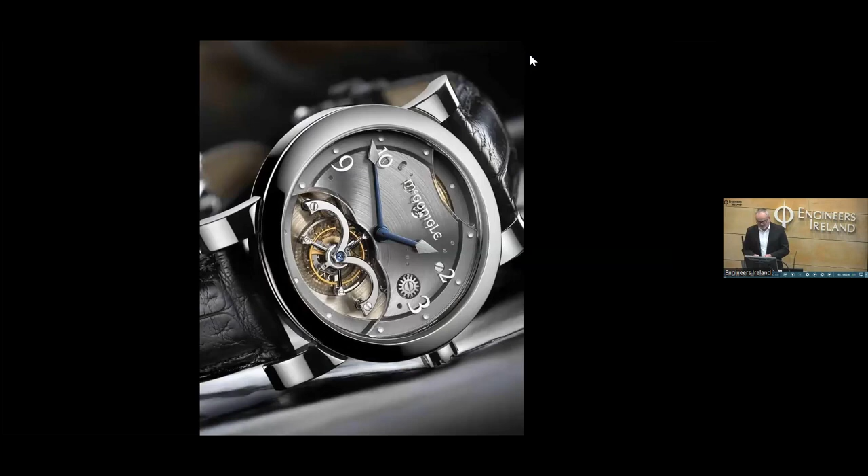Two of my brothers, Stephen and Anthony, are also watchmakers. They also attended the Irish Swiss Institute of Horology. Myself and Stephen developed our own brand, McGonigle Watches — this was made at the Christophe Claret company in Le Locle, and this is our first model. I've since left McGonigle Watches, and it's now run by Stephen, who is making some extraordinary watches.

He currently makes a minute repeater that is absolutely wonderful — one of the finest, I think, on the market. He has another brand as well, McGon Watches, at a more accessible price point, but it's another wonderful brand he has developed.

I developed my own brand, Ilon Watches, and this is the model I currently make, the HB1. I'll talk about it later on, towards the end, after I show some of the techniques I use to make the watch.

With this talk, I wanted to cover how watches were originally developed and some of the techniques used to make them, how they transformed into precision instruments, how eventually they were industrialized, and how modern techniques, technology, and materials have since been applied to how they're made currently. The first watches appeared in the 16th century.

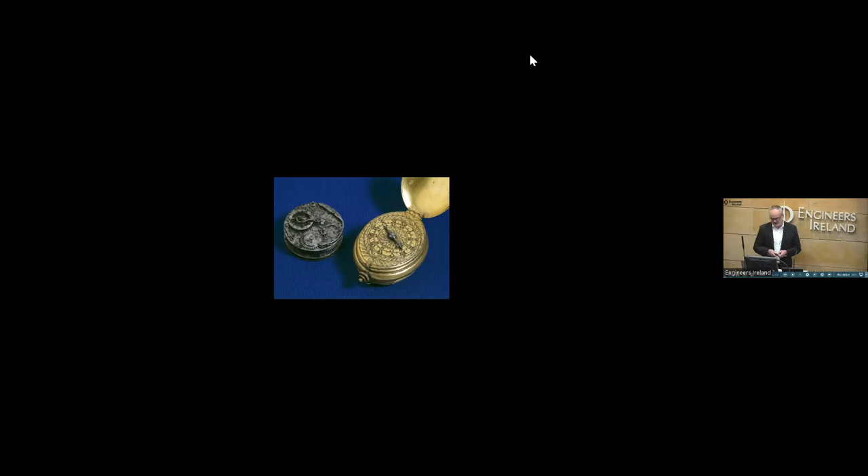But they were sought after by wealthy people, as symbols of prestige, and they advanced in the 17th century to more ornate watches. You can see the introduction of brass over iron — they began to understand you'd have much greater wear qualities with gears made of brass meshing with pinions made of steel.

They also started to develop more sophisticated equipment to make the watches, using more indexing tools to get more even cuts on the wheels. They would use jigs, so with a jig you're holding a very small component and using a large tool to work on it. The jig guides the tool, giving a more precise and better finish, all of which contributes to lower friction. The result is better power transmission, better timekeeping, longer running.

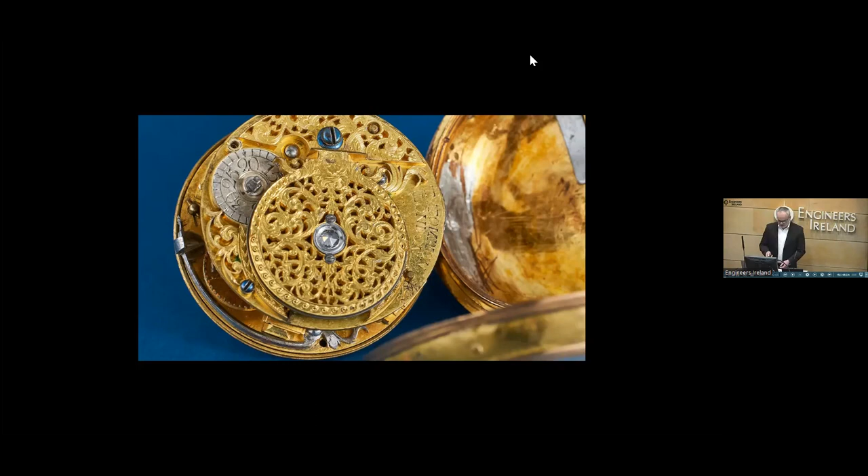Then in the 18th century, watches became more precision instruments. Obviously you still had watches that were ornate and made for very wealthy people. But there was a great need to solve what was probably the technical challenge of the day: the calculation of longitude in navigation.

Latitude in navigation is relatively easy to calculate. You measure the height of the sun at midday and relate it to a set of tables for the time of year, and you can tell what latitude you're on. But longitude is a lot more complicated, because the sun, which is the basis by which you measure your position, is traveling across the sky. It was a puzzler. The only way they could determine their position was through dead reckoning, and that was always very approximate—your calculations could be thrown out very easily, and once they were, you could not reestablish your position.

So the solution was thought to have been worked out by astronomers, that they would find some way of relating celestial observations to where you were and calculating your position. Incredibly complicated solutions were devised. Some of them worked, but they weren't really applicable from standing on the deck of a moving ship.

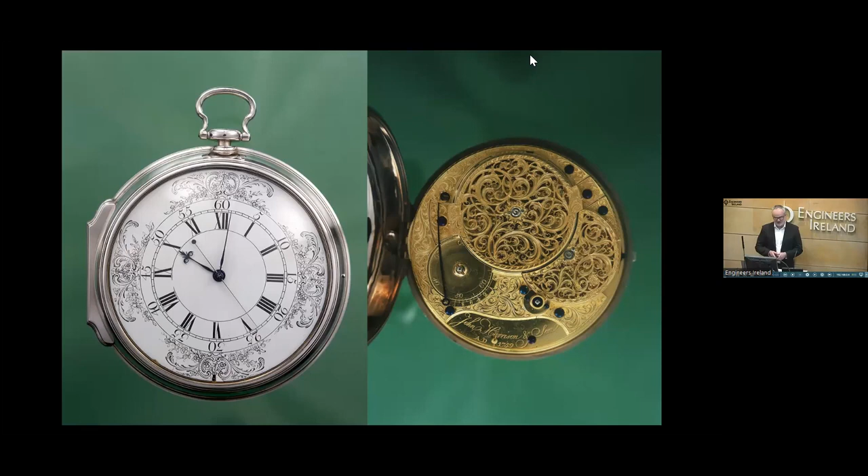They were technical marvels. The first clock he made, unsurprisingly for a carpenter, was made out of wood—even the gears were made out of wood. But he displayed a great understanding of materials, using lignum vitae, a wood that produces a natural oil, for bearings, to avoid the necessity of using a lubricant.

He used diamond for the impulse surfaces, and he also used a system of thermal compensation. Temperature is a problem with timepieces because variations in temperature cause metals to expand and contract, which varies the timekeeping. He used measured lengths of materials with known rates of expansion, paired with other metals with different rates, using them against each other to perfectly balance out the thermal compensation.

It was a kind of groundbreaking moment, because for the first time in history, people were placing their trust in an instrument rather than observations in nature. They were placing their lives and their fortunes in this technology, and it was a groundbreaking moment in human history.

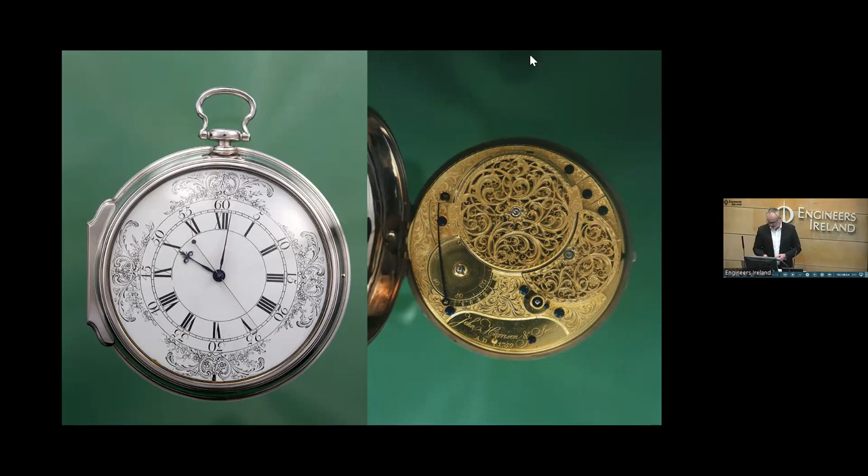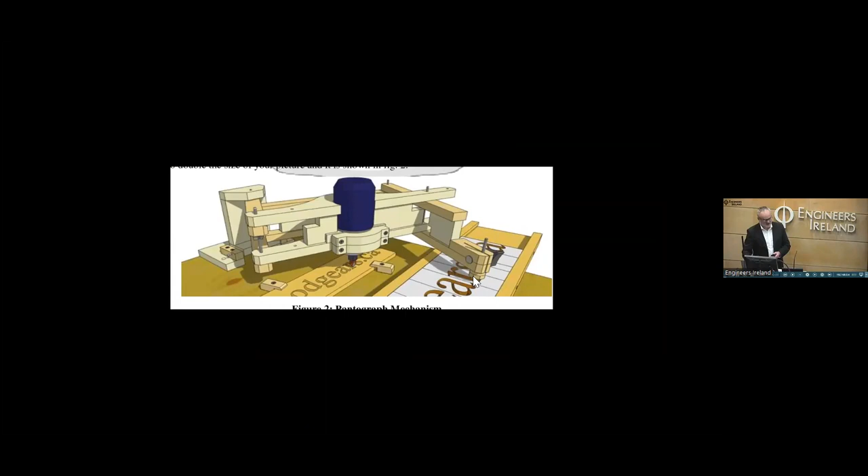One of the first tools to help with this endeavor was the pantograph machine. Engraving machines nowadays use this principle, where you have a template, and following the arrow here, you're using the template to follow a large pattern, and it's engraving at a smaller scale. The scale can be set by the length of these levers and how they work together.

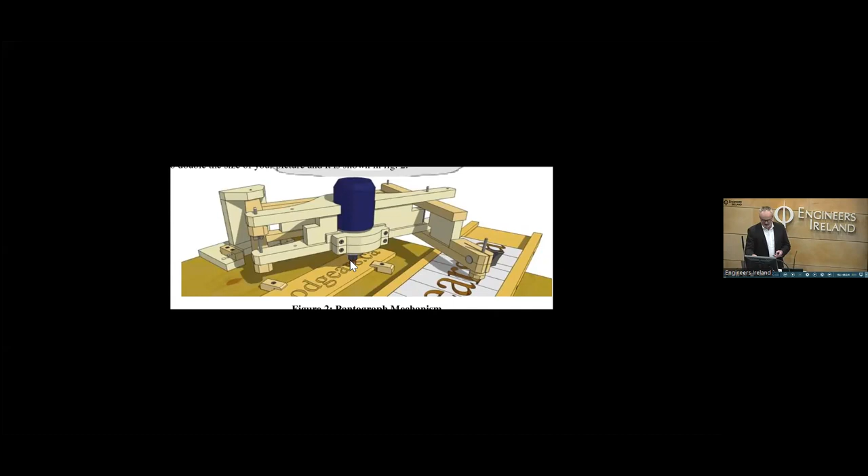Rather than a quill or a graver marking a surface, that quill could be interchanged with a machine head. I was trying to find a machine where you could really see what is going on, and here's one from a woodwork workshop. It's not a watch workshop, but you can see the pattern or template is here and the machine head is there. So you would trace around the profile of the part which is here, and the spinning machine head would machine the component at a much smaller scale on the table there.

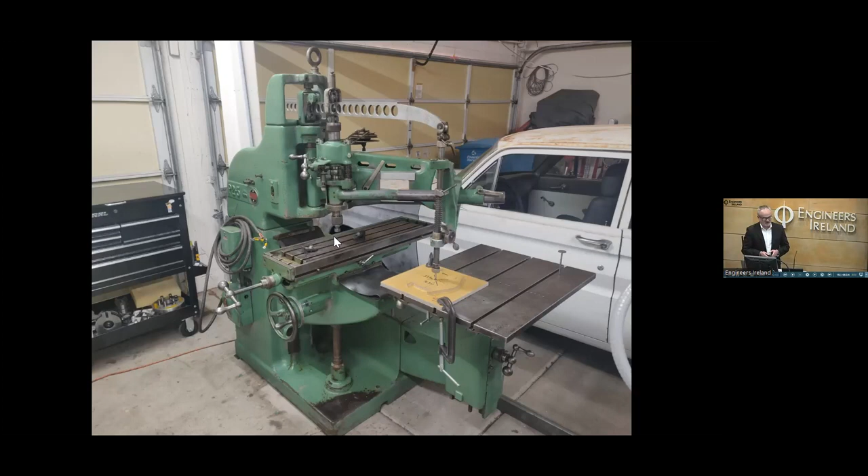That was one of the machines that helped to industrialize small watch components. Also, Jaeger-LeCoultre came up with extremely fine measuring instruments, and checking the precision of the components once they were made was of the utmost importance as well. The development of these tools made that possible.

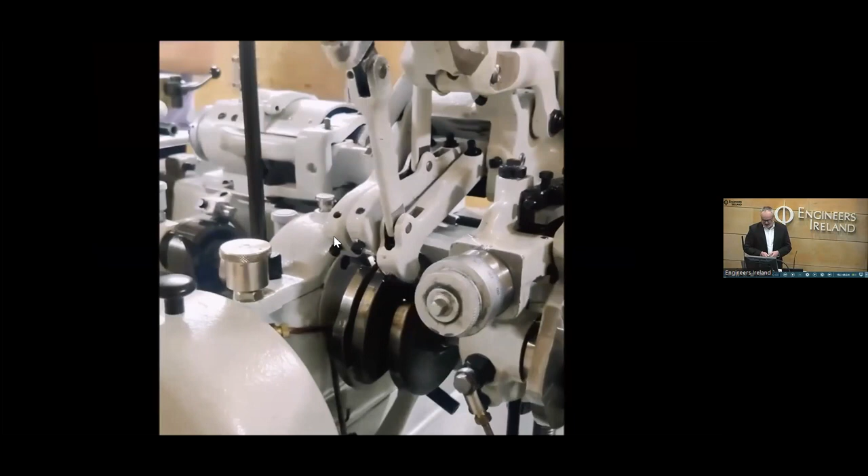Towards the middle of the 19th century in America, they started to industrialize. They created the first production line to produce watches. And Henry Ford, who had watchmaker training, followed the principles used in the production line of watches to develop the production line in the Ford Motor Company.

With the development of steam-powered tools, the aforementioned tools such as the pantograph machine, stamping tools, and all sorts of equipment like that, watches could be made in vast quantities. By the end of the 19th century, compared to the beginning, the average price of a watch had dropped by up to 95%, it's calculated. So it was now accessible to nearly everyone.

That of course had an important social impact, because people could set a precise time to go to work, and everything that follows with precise timekeeping.

Here we can see one of the very interesting tools for making turned components: an automatic lathe. These have been superseded by CNC controlled or computer controlled lathes, but I find these really fascinating. When I first arrived in Switzerland, these were in common use in companies such as the Swatch Group, so you'd have vast rooms with hundreds of these lathes just making tiny screws and pinions and shafts.

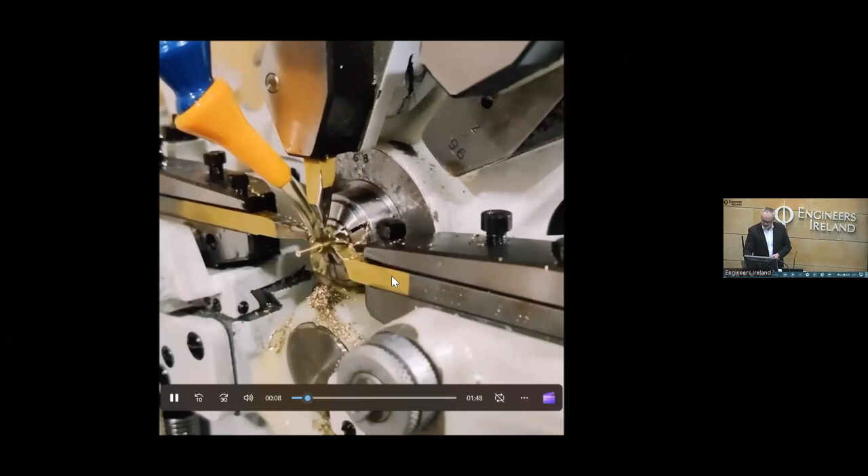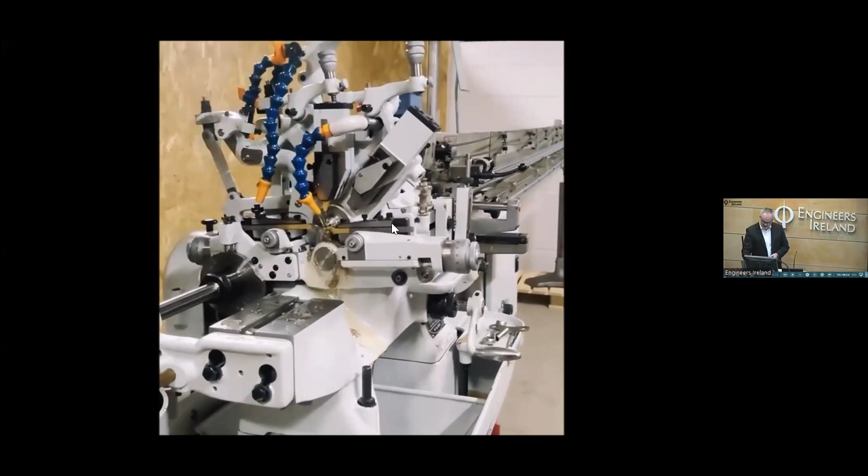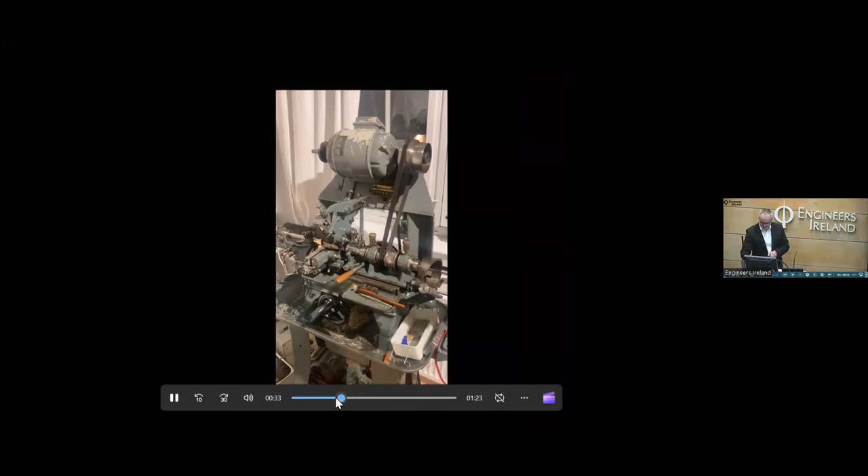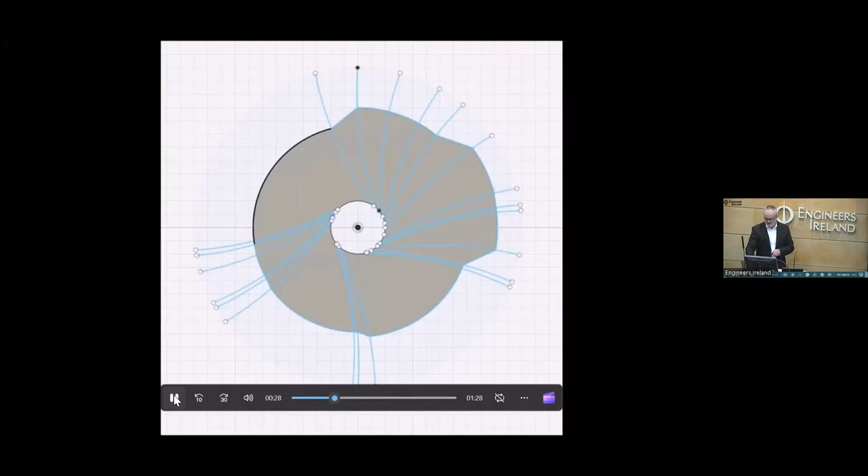The cams are actually guiding the cutters as the stock protrudes, fed through the collet. As the bar of metal advances, you can see the profile of the cam, and that's the command cam. There you can see they are screws—a little train of screws that have just been turned, and he'll part them off and finish them on another machine. I just thought that was a fascinating thing to see in motion.

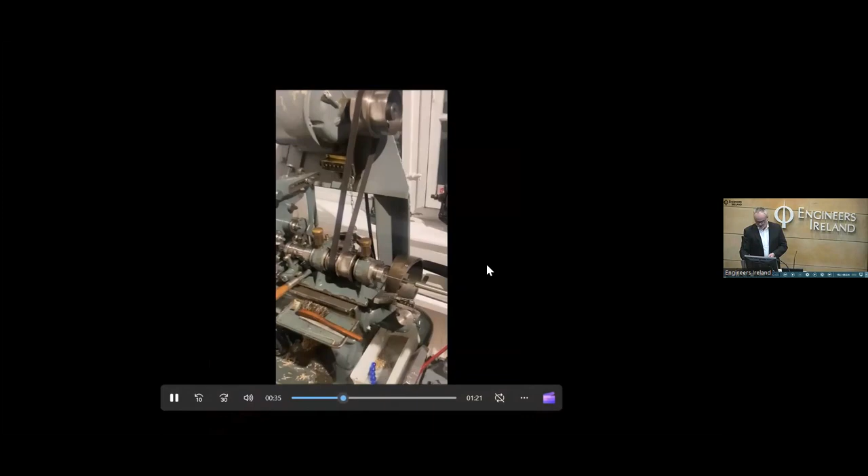But it also helped in the industrialization of watches. So in the 20th century, we continued very much in the same vein.

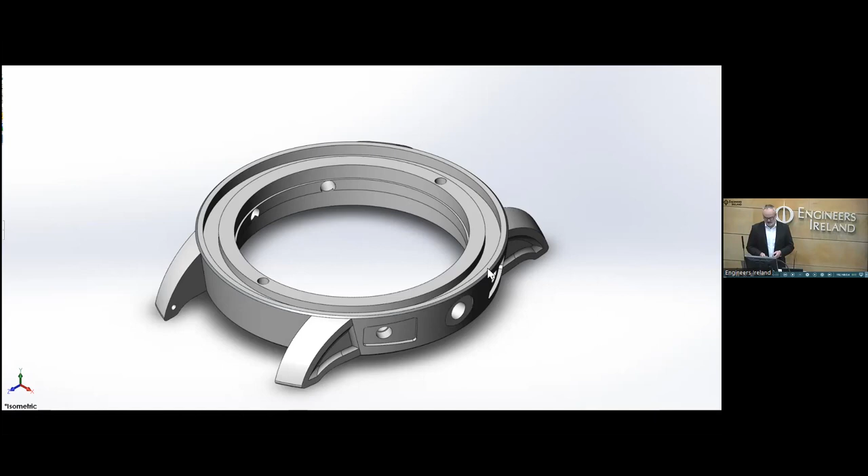You can also check the aesthetics of a watch, and get very accurate renderings to see what your watch is going to look like. What we had to do when I first arrived in Switzerland was work off hand drawings of watches, the aesthetic drawings.

You would get technical drawings, you would make it, you'd look at it and go, okay, we need to change a lot of things here. Now an awful lot of that guesswork can be taken out by rotating the watch, looking at it from different angles. You can get the cases 3D printed, check the volumes, see how it is on the wrist. It's saving time, saving money, and allowing us to make much more advanced designs.

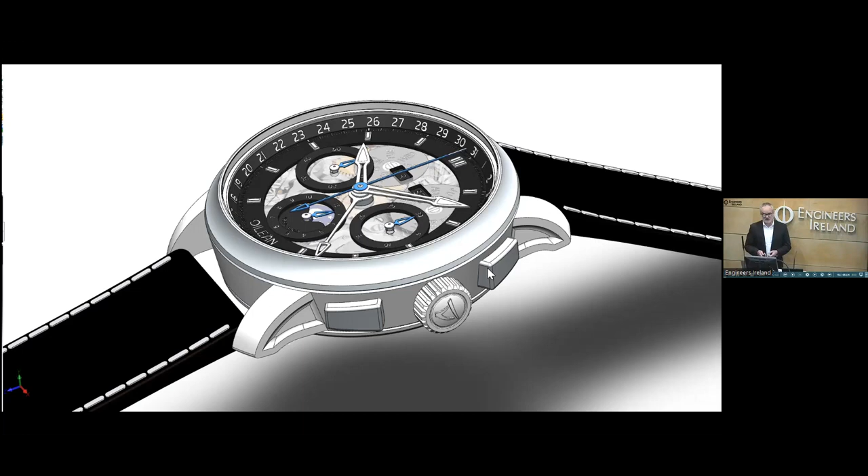So I'll just flick through a couple of these here. Now, I didn't do these drawings myself. The man who did is in the room here, Graham Houghton.

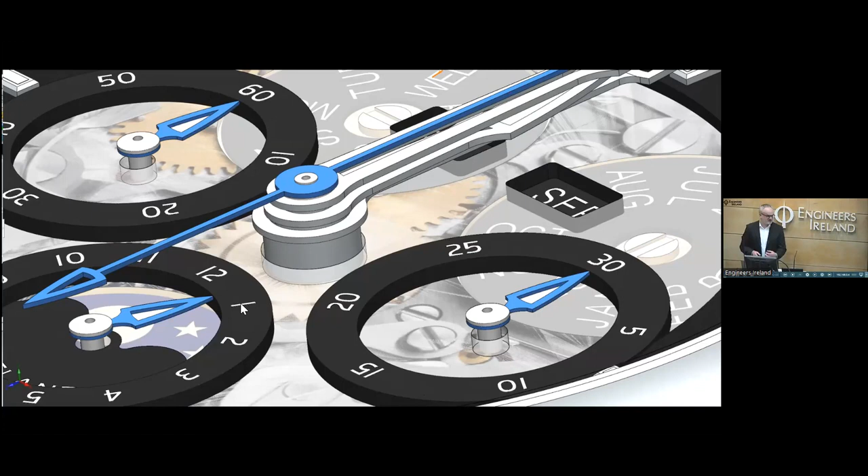And you can see here we have a sapphire dial on the bottom, and the raised part of the dial is machined. It's machined brass, which is then coated, finished, and printed. So it's quite a complex dial, made all the more easy by the CAD process.

Here you can see the seconds hand, again for the HB1, the chronograph. The reason I'm showing this is because apart from being a nice looking hand, it's also calculated to have the center of gravity as close to the center as possible. This is very important on the center seconds hand, because you can get an awful wobble if it's not properly balanced. And with a chronograph, you've got quite a violent return to zero, and if it's not balanced, that can also have repercussions.

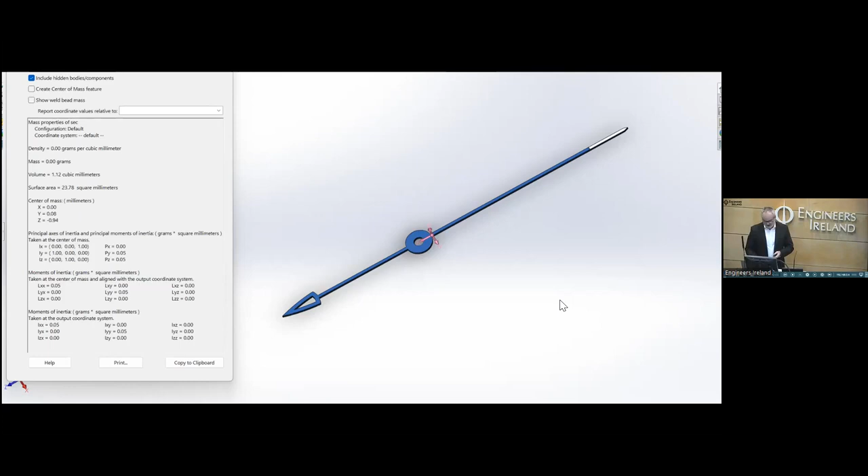So CAD makes the designing of the hand so much easier, and there's an accurate rendering that you could almost mistake it for a photograph of the watch. So again, you can see how this is very, very helpful in determining the aesthetics of the watch before you actually make it.

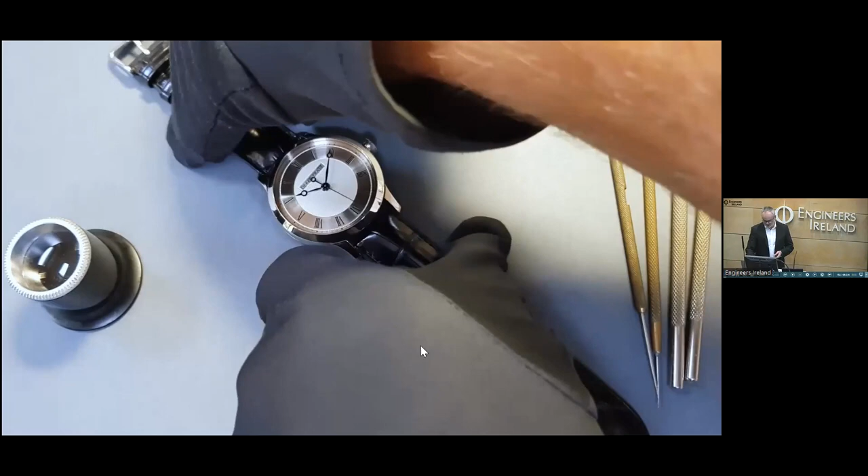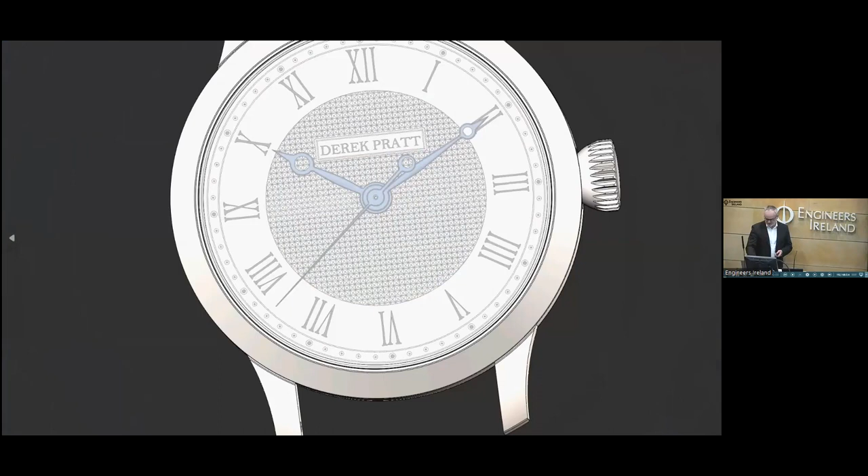Here is a short video of a watch we worked on together. The original inspiration for the Remontoir that Derek Pratt incorporated into his Tourbillon pocket watches was taken from a small clock. The idea to use his Remontoir in a wristwatch came prior to Derek's passing.

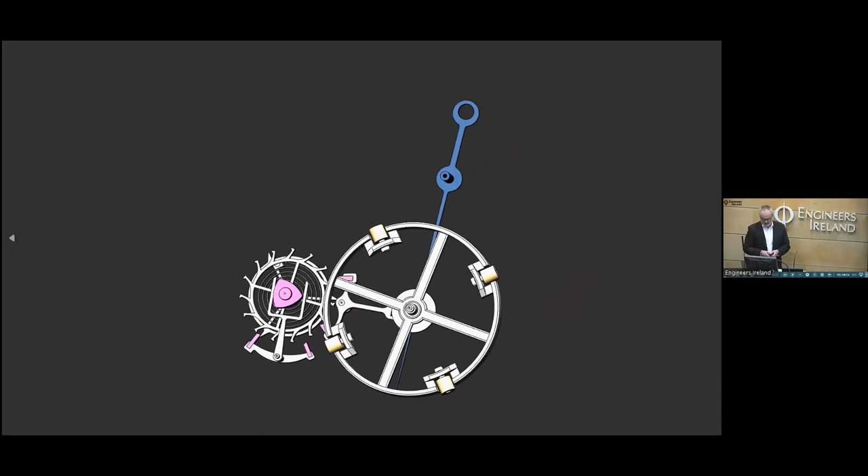You can check that something is functioning. Functionally, the Remontoir regulates the power from the mainspring, which is delivered to the escapement once every second, resulting in an extremely consistent power flow and thus better timekeeping. You even get views from...

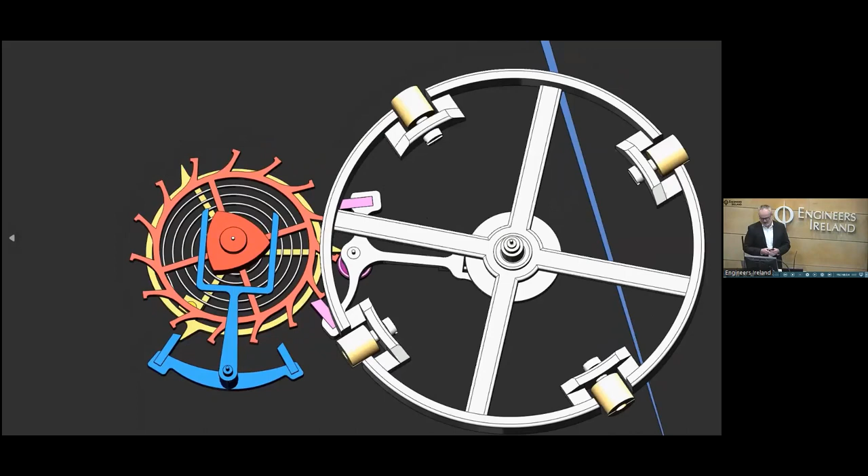...spring that is directly coupled with the escape wheel. This process repeats every fifth beat of the balance wheel.

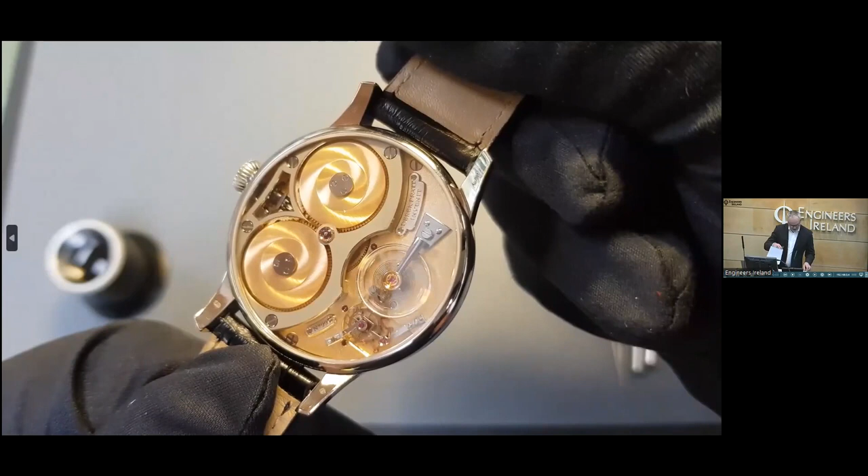I just want to talk about materials. I mentioned earlier on, and you often hear talk about jewels in a watch. Jewels are non-precious, they're synthetic. It's synthetic sapphire with an oxide added to give the ruby color. Originally, they were either diamond or ruby in watches in previous centuries. Nowadays, for greater accuracy, they're made in a furnace. They create a glass boule, as they call it. They slice it, polish it, cut it into little rondelles, and pierce it either with a laser or originally with a copper wire impregnated with diamond.

The jewel, well, the bearing is composed of two parts: the jewel material with a hole in it, and the pivot on the wheel that's protruding through. You would have another one on the other side of the bridge, so one on the main plate, one on the bridge, pivots at either end. So you can appreciate, you can really accurately control the amount of play.

It's used because it's a hard material. It doesn't wear very easily. It's got good wear characteristics while working with steel — it doesn't wear the steel very badly at all. It also has good oil retention qualities and very low friction. So it's a fantastic material, and it really was a big leap forward in watchmaking as well.

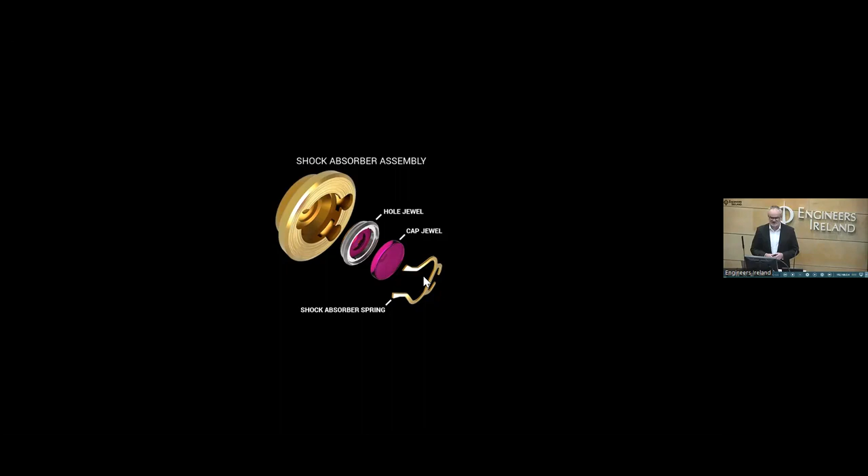That assembly—I'd say the smallest jewel there is about the size of a full stop. They're tiny, and so you can really appreciate just the amount of precision that goes into making these.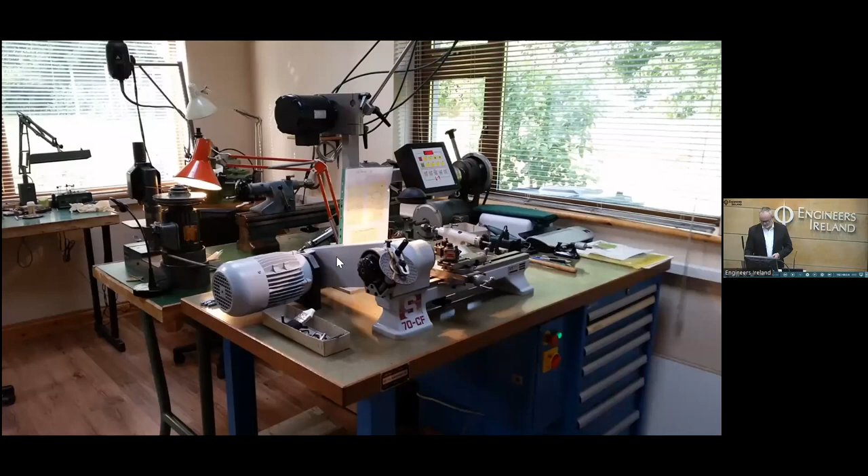And there's my lathe with an indexing fitting. By using that, there's a worm gear here on the bottom, and you can advance the machine head by very precise degrees. We use this principally for cutting wheels, so you would have another machine head mounted on the cross slide. You would index it with the wheel, cut a tooth, bring it back, advance it to the next, and so on. Those discs are interchangeable, so you can have a vast variety of tooth counts based on that.

That's the small watchmaking lathe, and again, another view of the jig bore.

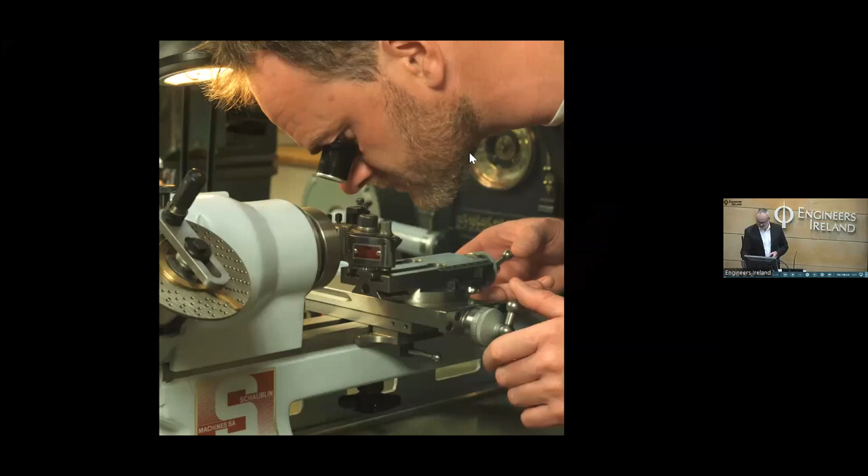Just some lathe work. Here you can hold delicate components by gluing them onto a face plate. In the past, they would use shellac. You can spin the bridge and work on putting a final finish on a bearing, or opening out a hole to take a jewel, or doing a milling.

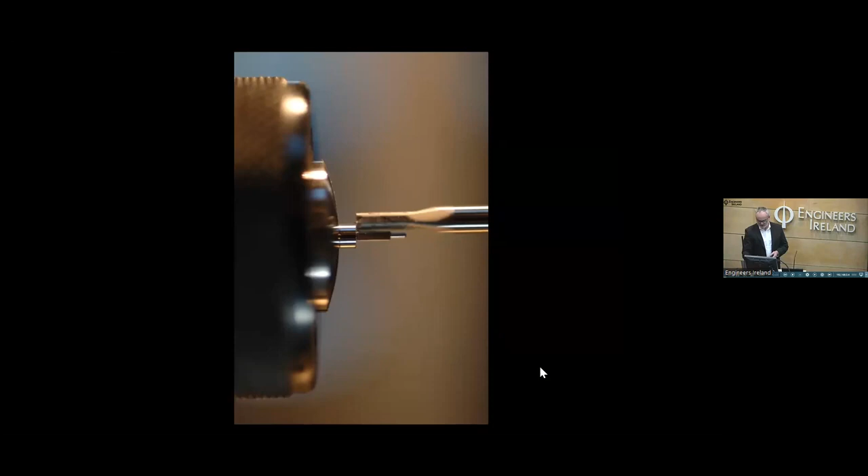Here I'm machining a winding stem. I'm cutting the square of the winding stem. I'm cutting the next diameters, and there it's close to finishing.

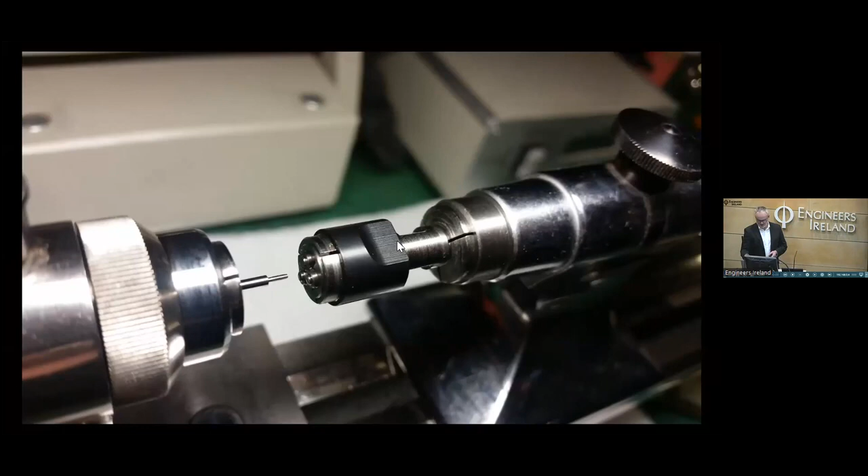On this lathe, I'm doing the threading. These are tungsten carbide discs rather than the old-fashioned dies. So I can actually turn something in hard metal, and with the tungsten carbide discs, do my thread. They're discs, so they roll, they don't tear the material. You get a very fine thread, and all I have to do after that is polish it. It's just good use of the modern materials we have at our disposal.

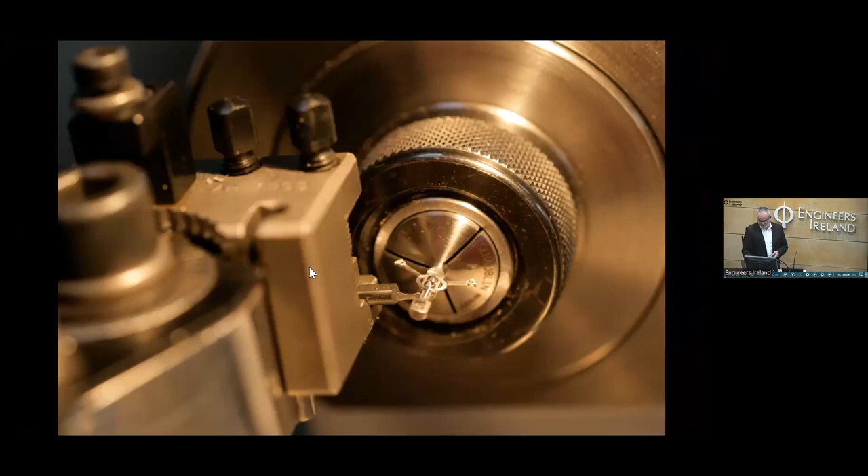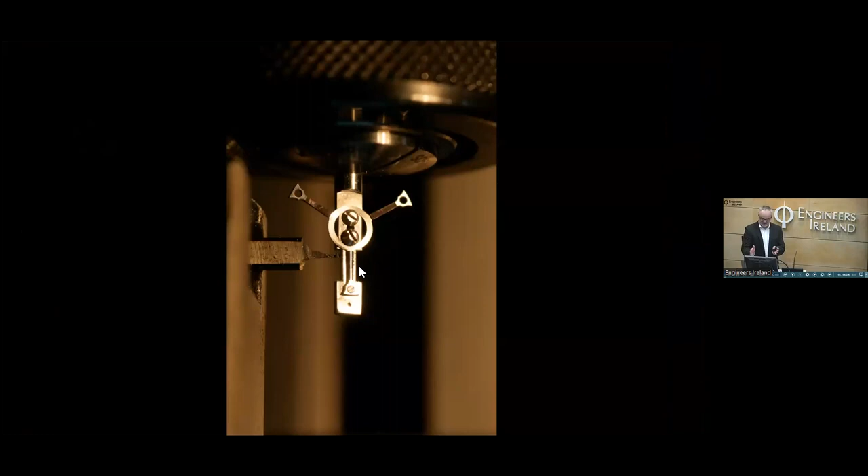Other things we can do in the lathe, we can get complex shapes and work on the arms of a tourbillon cage. Once you have the arm, which is tapered and curved, machined, you can go on to the next stage, which is the polishing of the arms and the rest of the cage with great ease. You've got uniformity by machining it accurately first, and then you can move on to the polish, and you can get a very nice finish by using this process.

Other machines we have in our workshop - this is an example of a tool called a Jacot tool. It's for polishing pivots, or burnishing pivots more accurately. With a bow, we would rotate the piece. You can see that it's going to pivot between this fitting, and there's a bed where the pivot lies, and you have different sizes depending on the diameter of the pivot. With the bow, we will rotate this spool, which with little arms that we engage in the arms of the wheel to rotate it. I think we have a video here just to show it. So just put a bit of oil on the various surfaces.

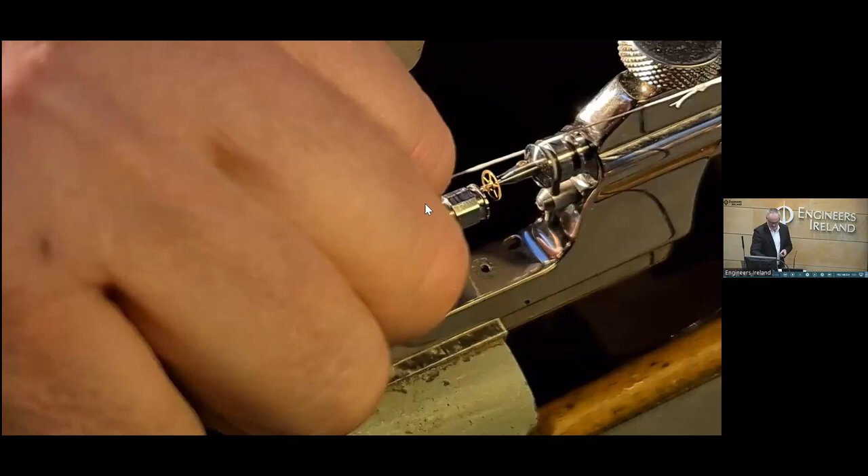It's notoriously hard to film these things and keep your hands out of the way as well. So I'm just fitting everything in place and locking it down. This is slower than I thought it would be.

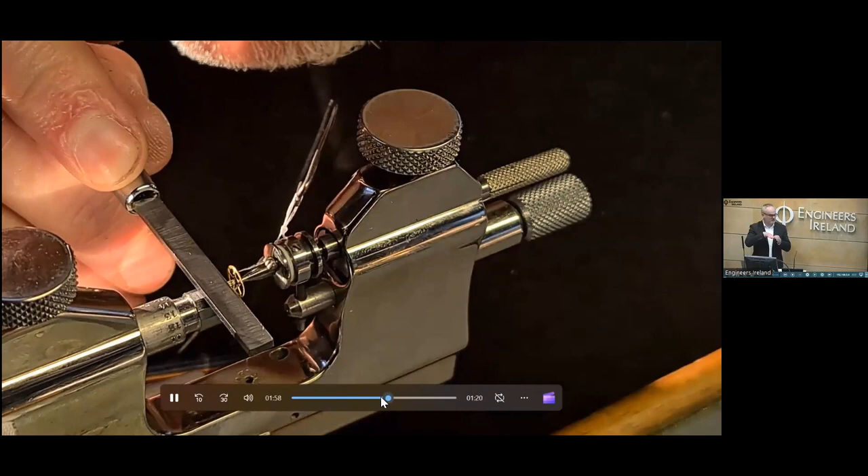And there's the burnisher. You really have to get your hand in to feel the pivot under your burnisher, and once you have it, you have to be as straight as possible. Otherwise you'll get a very bad shoulder on the pivot. I'm rotating it and using quite a bit of pressure on the pivot while rotating it. In French, to this day, it's called roulage de pivot - they roll the pivots. It's not that you polish them, you're compressing the material, thereby hardening it, and you're getting a fine polish at the same time.

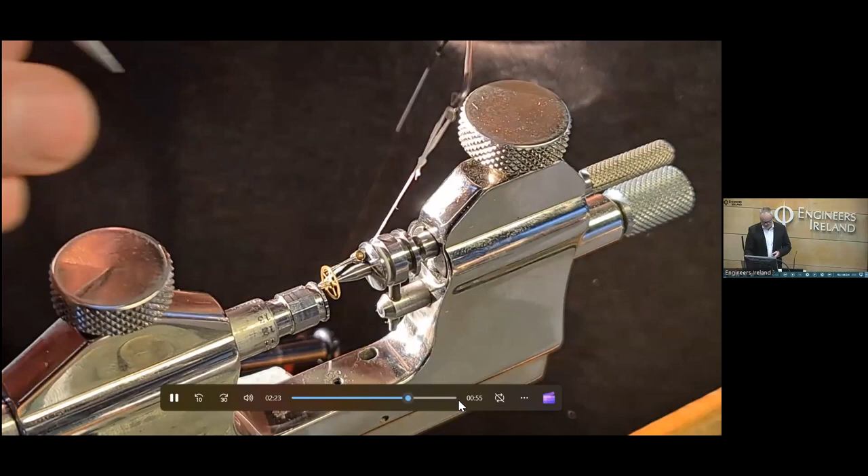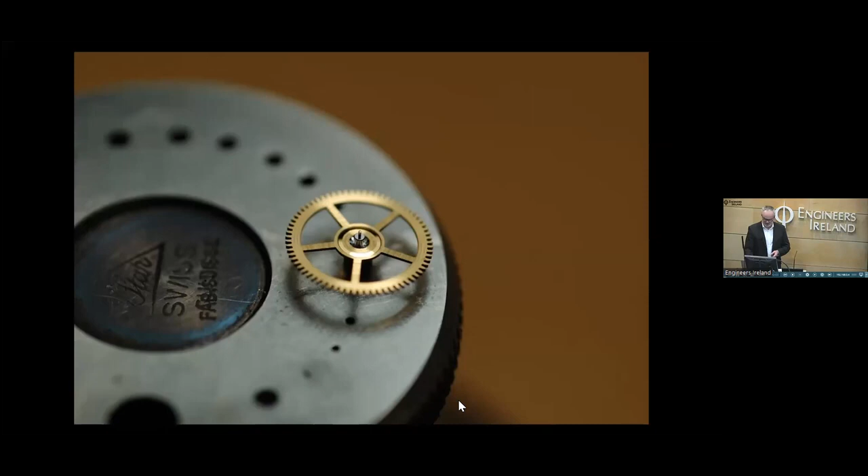Okay, so you can see the pivot there at the end. It's from a different wheel, and this is the assembly of a wheel. So just popping it together, put the wheel on top, and you can see there's a countersink which we rivet over the wheel to make sure it's solidly seated and it's not going to move. And there is a pivot that has a nicely polished seat.

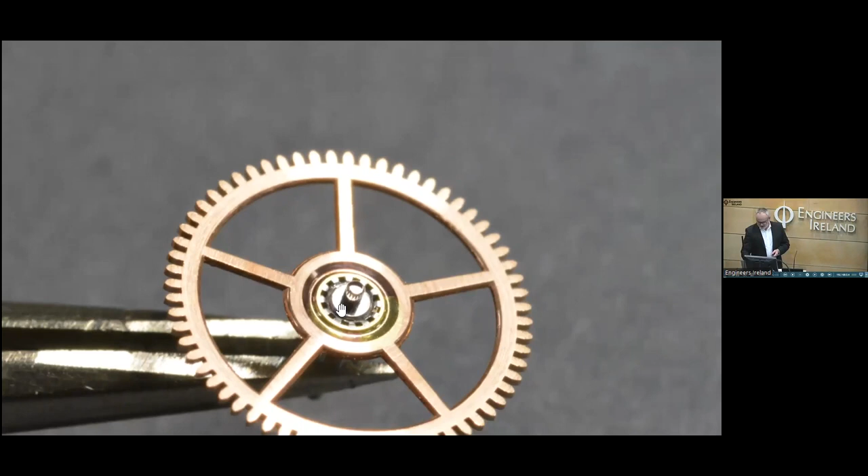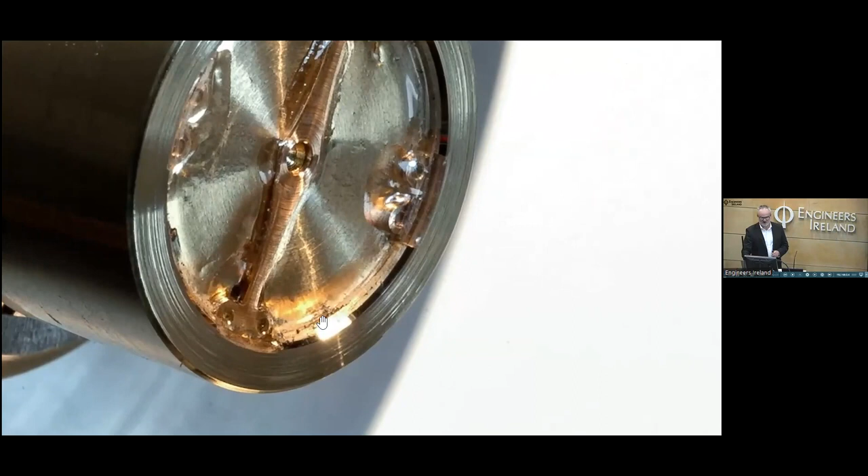I mentioned diamond tools earlier on. This is a diamond graver that's doing a diamond cut on a balance wheel, and when your diamond cut is finished, you don't have to do anything else. The polish is really high, and it's amazing that a cutter can give you that finish straight away.

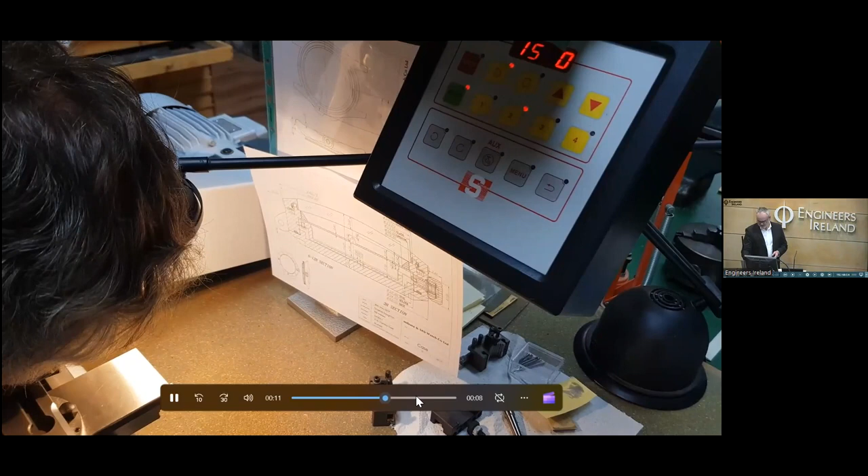And here we've just various other things. This is working on a case. And really what I'm trying to show is just...

I'm trying to give a representation of the type of tasks I go through with the various machines. That's not your way there, is it? No.

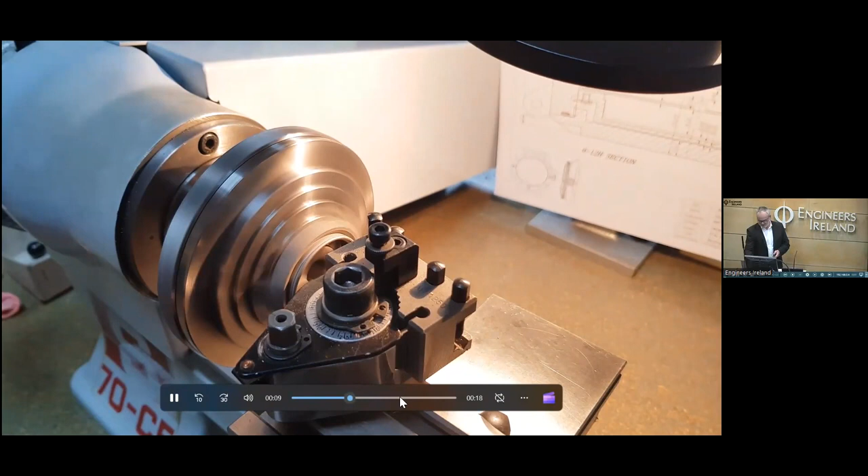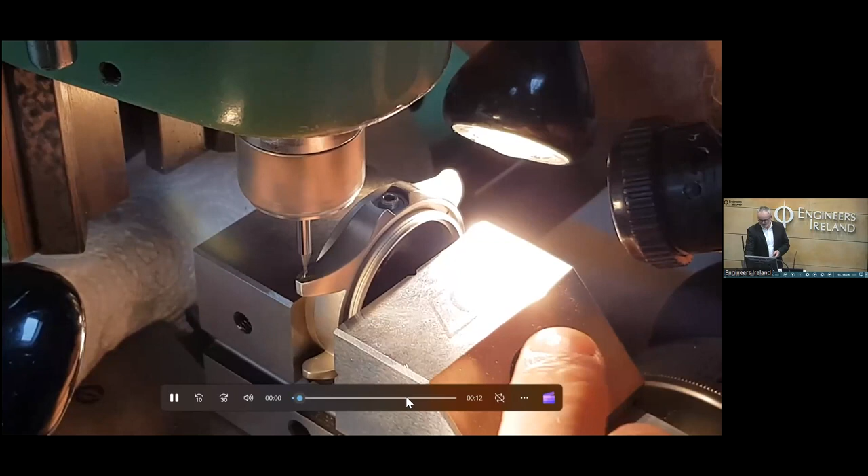And this is the jig bore machine. So I can clamp things onto the table, center them very precisely, and there I'm using the tungsten carbide end mill to drill into a case.

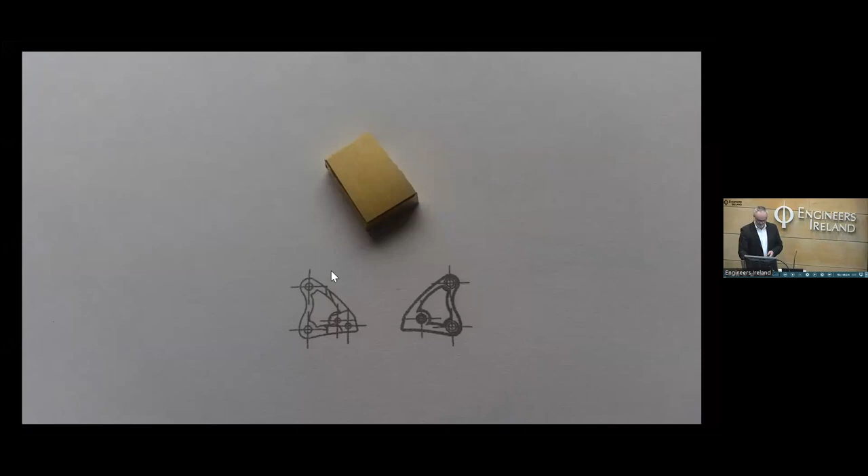For prototyping components, it's invaluable. It's much slower than making things in production, but if you're working on a prototype piece, it's good to see how something is going to work by making it by hand first. Then, when you're certain that it works, you can alter the CAD drawing to make sure you've taken all the modifications into account, and then send it off to be made by CNC, and get them made in quantities.

Here we have a bridge that we're centering over another to make sure that it's utterly centered. So you'd mount everything and drill right through the hole, and then you're certain that the jewel you set into the bridge is perfectly centered over the main plate.

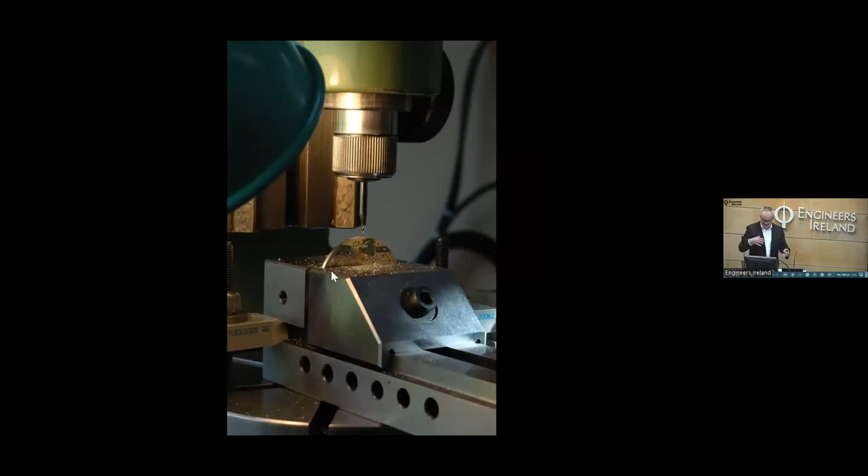More machining. Again, we can rotate the movement on the side and drill for the winding stem. So you can see through all of these tools, there's a wide variation of what you can do. Bit by bit you can work out how to make every component in the watch by using the lathe, the jig bore, and your hands.

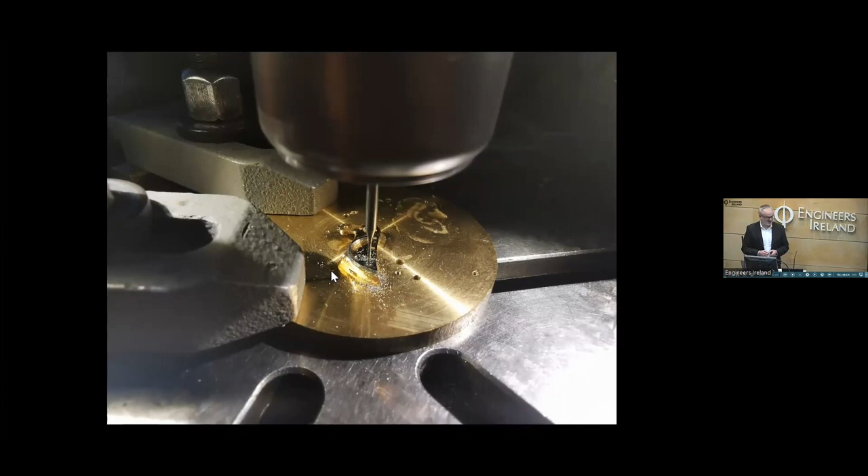So still, for prototyping or one-off pieces, you would cut out a piece of steel in the old-fashioned way with a fret saw. Then you file it to shape, and you might machine it on back into the jig bore again. So you'd machine for screw holes, for pinholes. If there's a very precise function, you'd use the jig bore machine to hit those critical parts.

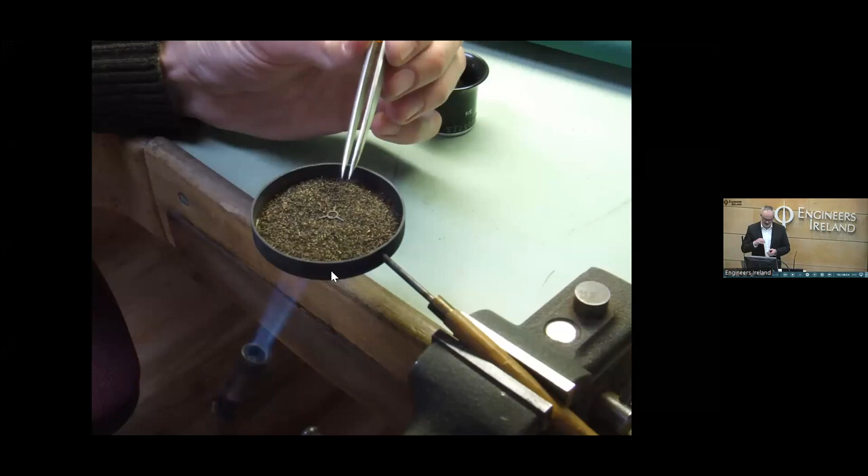Steel components, once they're made to size, we have to go through a hardening process. There's a component underneath that flame. Once it reaches a cherry red color, we drop it into oil or water, and then we clean it up and blue it to bring it to the correct temper. If we left it fully hardened, it would be too brittle and would break. So that's how we achieve the right hardness for our components.

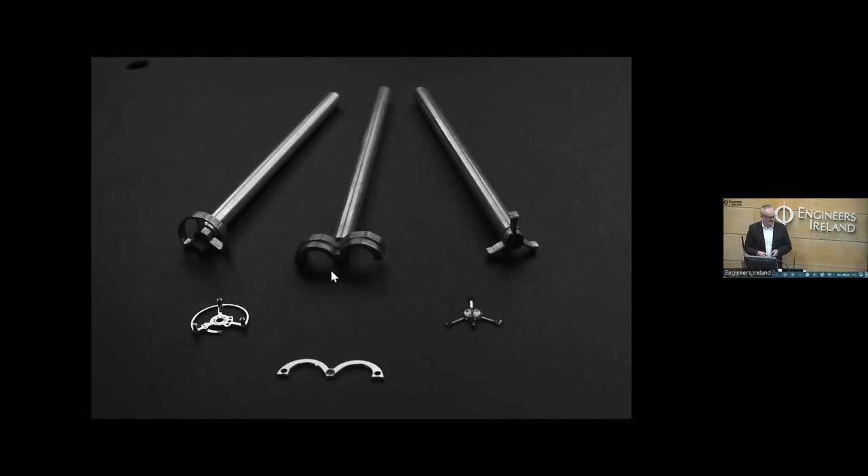We use an awful lot of jigs to hold the fine components, so you can do fine finishing, such as beveling, or even just cleaning up the parts. It takes a bit of time to make jigs for every single component, but it's well worth it. It's the only way you can work to high quality.

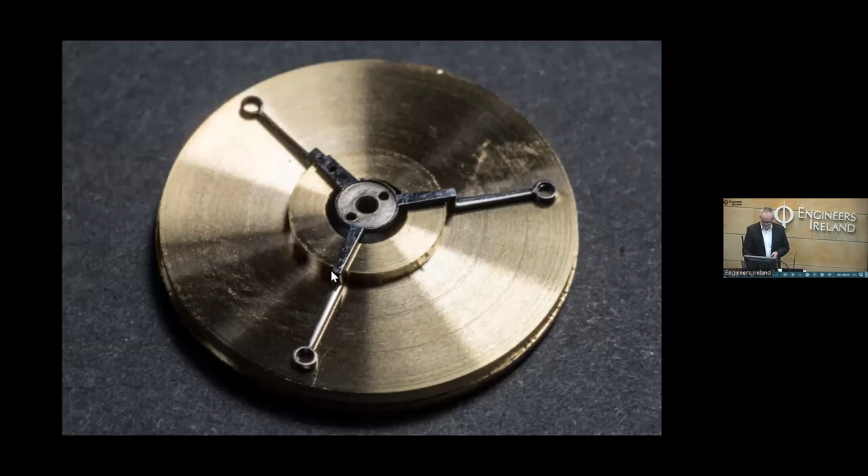So, for instance, this is a jig I'm making for a restoration piece. I'm just turning the disc. It's a tourbillon cage for a pocket watch. Then I cut out the bits that are in my way, and now I've clear access to work on the curved part of the bridge with files and polishers. You can see it's going through the polishing stage there, and there's the finished cage. And there it is, assembled.

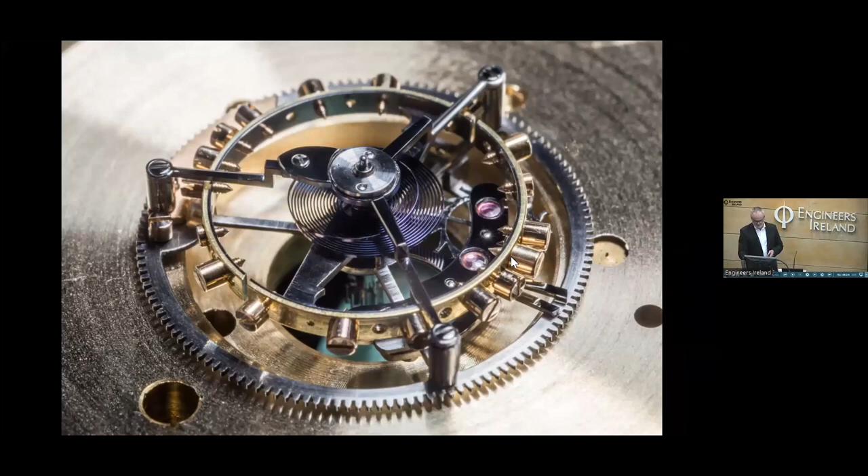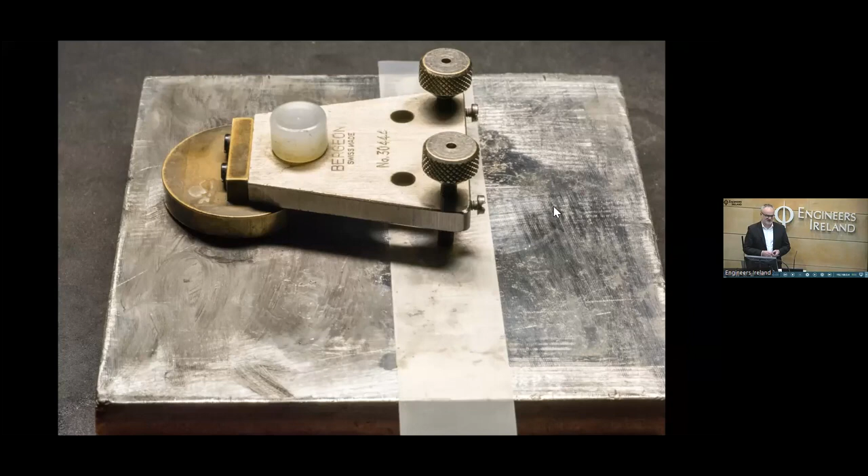We also do an awful lot of hand polishing. One thing at this level of watchmaking that's of critical importance is finishing. It's as important as the function. These are expensive watches, so they can't just work well, they have to look beautiful as well. A lot of the skill in making these watches is in high finishing.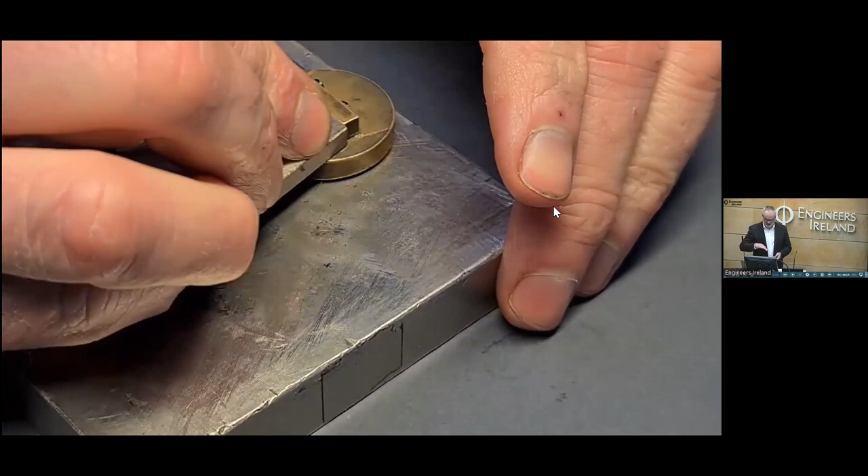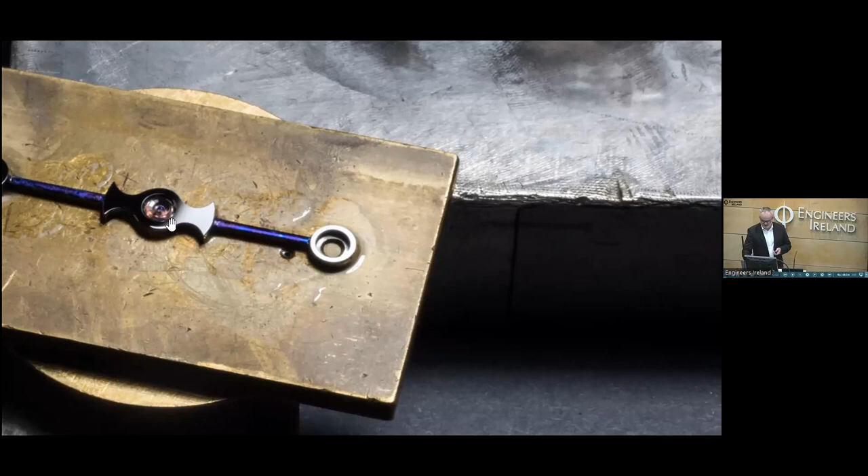So this is a tin block with diamond paste on it. I've mounted a part onto a jig, and we rotate it on the tin block until it starts to grind the component. The result is a mixture of finishes here: I have curved arms, which I've protected, but the top part is mirror finished—literally a mirror. You can see a reflection of your tweezers in the steel once it's properly polished.

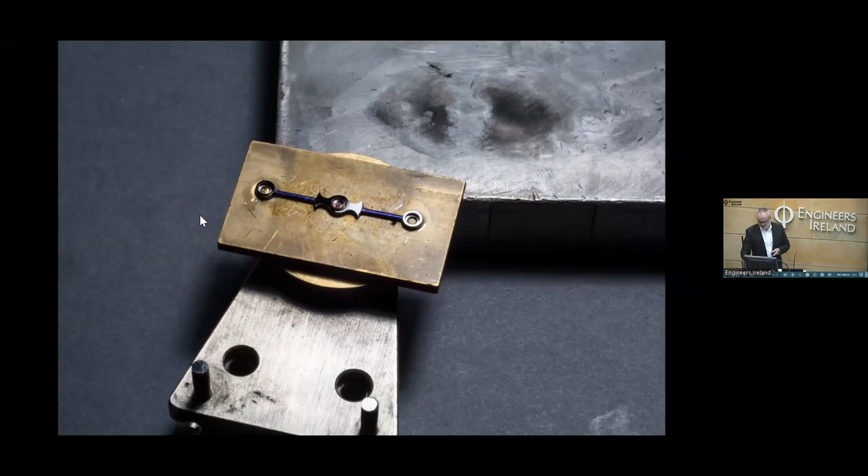And there's the finished article with the curved arms, with the varnish taken off. And there it is, finished and fitted to the watch, and the finished watch.

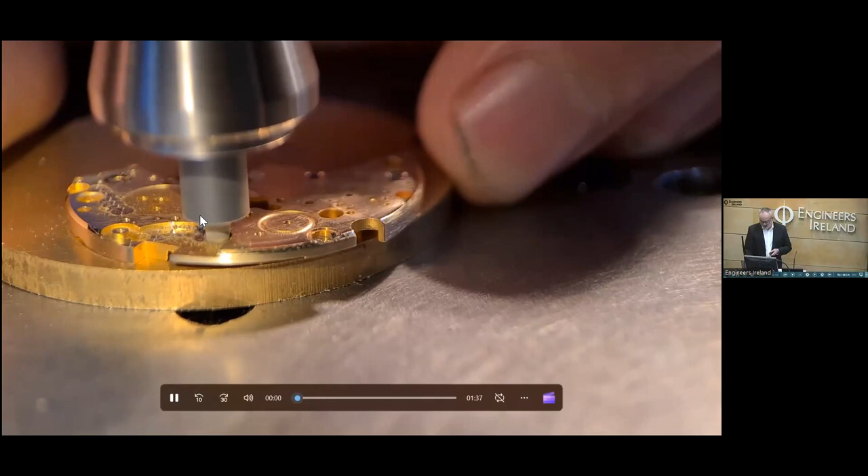We do various other finishes, such as here I'm doing spotting or perlage, where you use an abrasive to make swirly circles all the way around. You don't want to see any surface with visible machine marks, so we do something to every surface. In industrial or more mid-range watches, we would use sandblasting or industrial processes to give an overall finish, but at this level you want to handwork every surface, and a large part of the artistry is in the finishing.

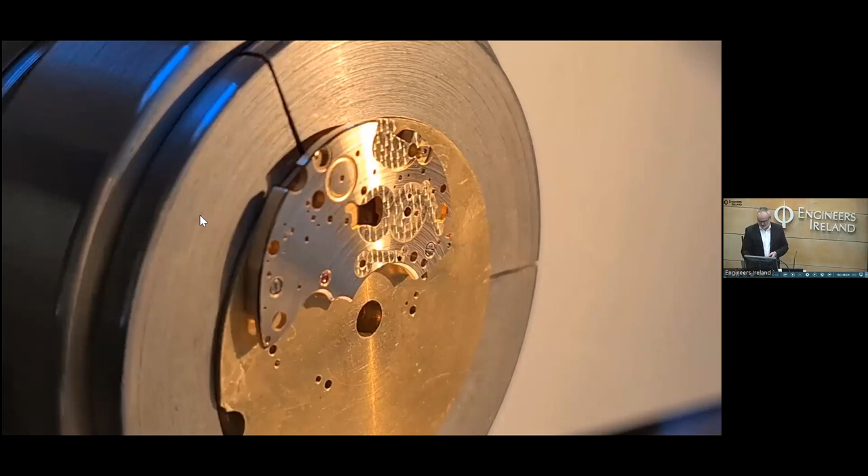And here you have circling based on a jig that I mounted plates on, and I can circle it very precisely in the lathe. Then it goes through an electroplating process for either gold plating or rhodium plating, and there's the finished bridge in the watch.

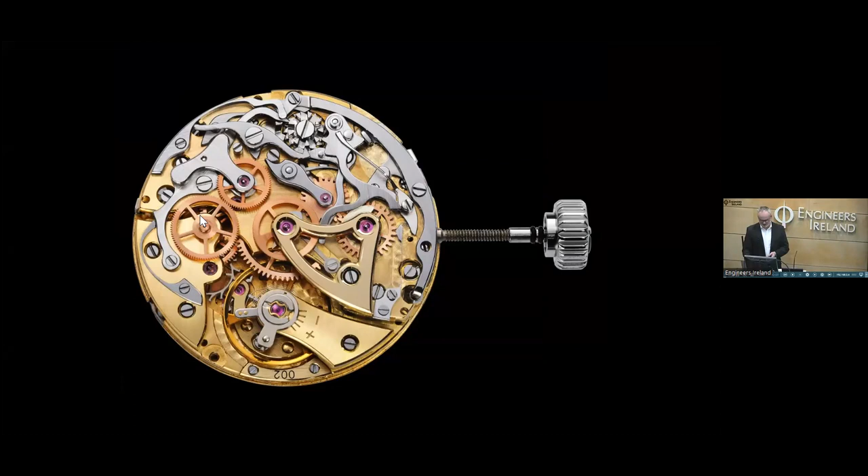And that's the top wheel, and there it is in the watch again. And that's the rest of the watch.

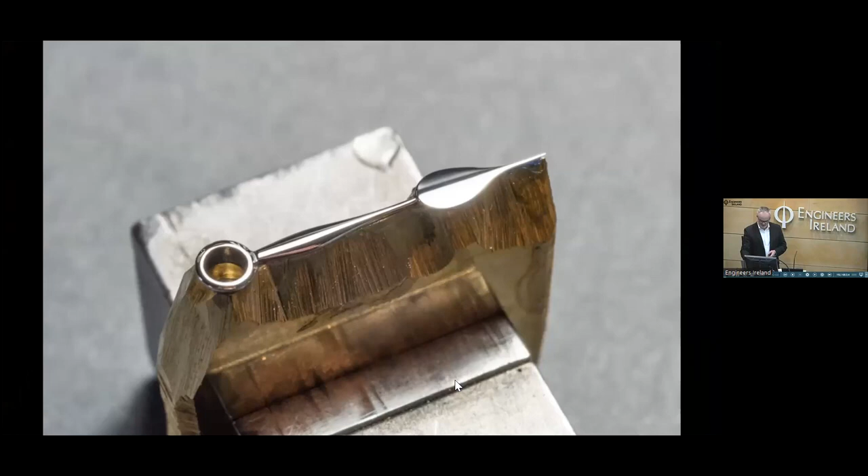I've just a few more slides. Here we have hands that I finish again on a jig I make up. The jigs aren't works of art, but they're not meant to be - they just supply a function, which is to hold something accurately, while you can just worry about finishing it without worrying about breaking it.

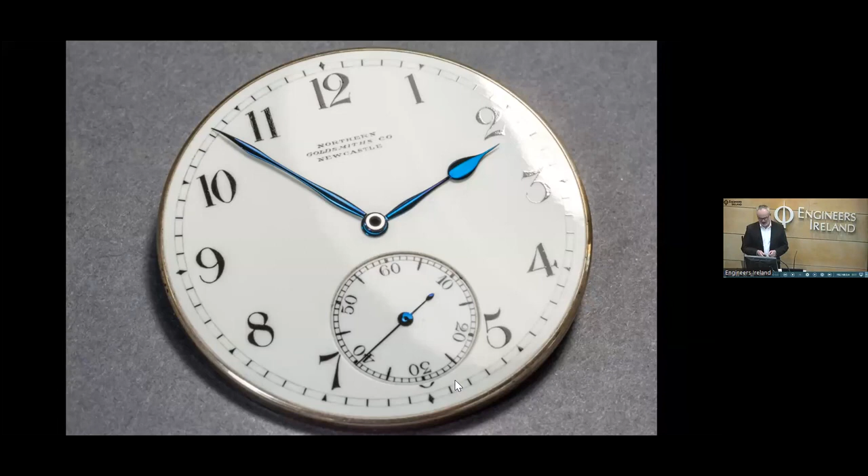And there's the set of hands fully polished. Then I heat treat them to get the blue finish. You can see the center of the minute hand - I polish that on a T-block again. So there's a lot of finishing just in a set of hands if you're going to do it properly.

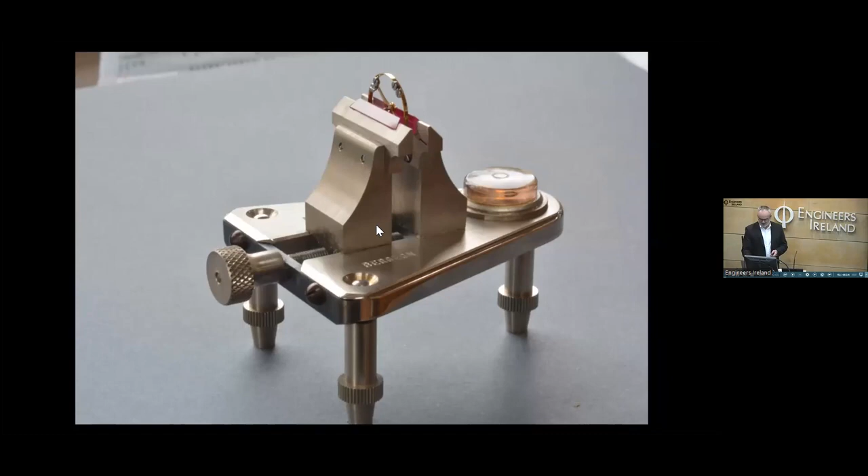Here we have the balance wheel. We poise it to get the weight perfectly even. If you don't do that, the timekeeping is completely out. So to get as precise timekeeping as possible, we try and poise that as perfectly as we can.

First on this poising tool, and then later on when it's in the watch, you measure the timekeeping, and by analyzing the rates in different positions, you can determine where the rest of the overweight is and remove it at that point.

Here we're making a hairspring based on the overcoil shapes that have been worked out by great watchmakers a long time ago. And this is a...

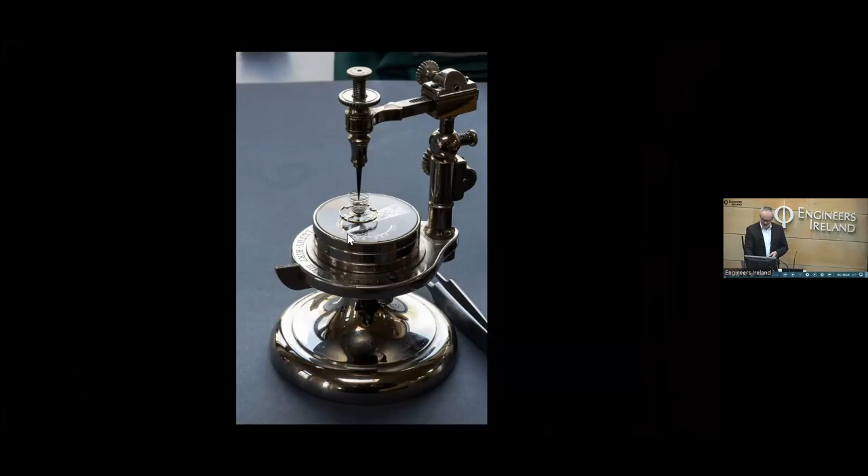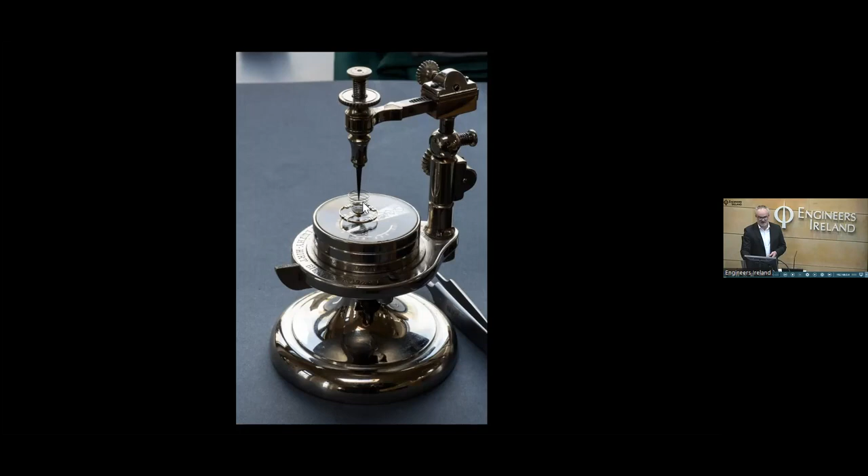...hairspring or vibrating tool. You have a master hairspring underneath. This spring you're working on, you're trying to determine the length of the hairspring to match the two frequencies of the top balance and the one below.

And here you can see they're actually quite close. You can see that the arms are moving more or less the same together.

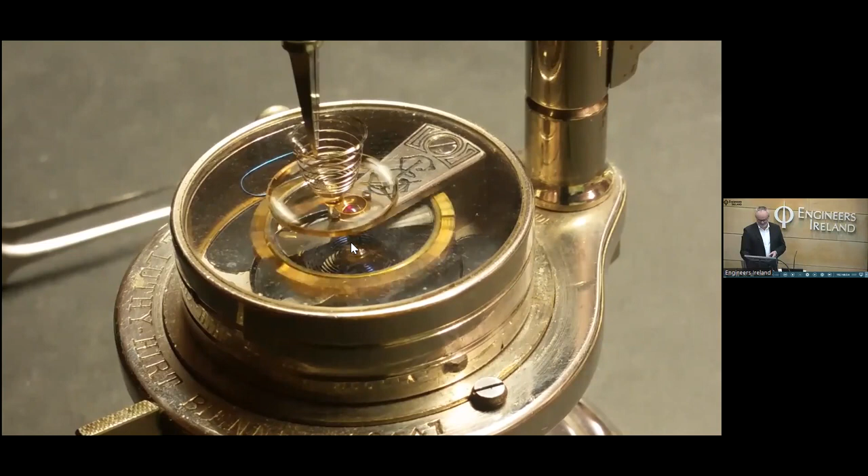For anyone who's done it, the first one you do, you'll spend a few days doing it. You'll probably go through a few hairsprings, but the more you do them, like anything, the easier it gets. And there's the finished hairspring.

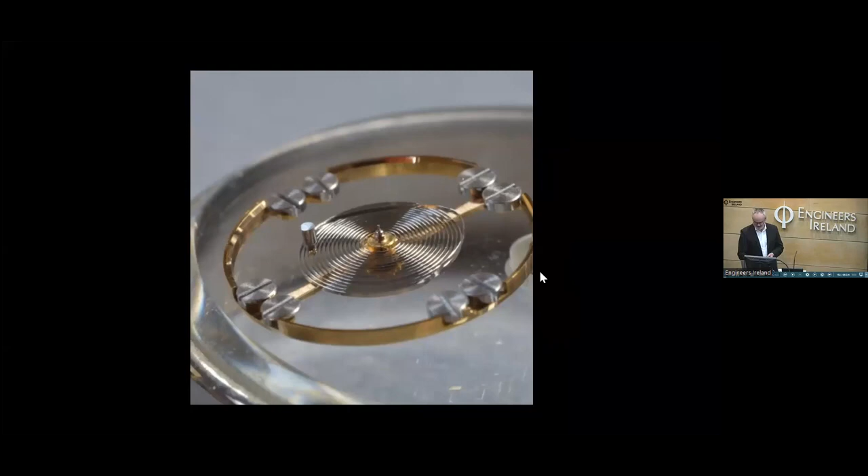So that's pretty much what I do. Just to move on, sorry, I think I'm running over time here. But I just want to talk about two things.

First of all is the concept of an Irish watchmaking industry. Why wouldn't we do that? The idea of a high-end watch having to come from Switzerland - that day is long past.